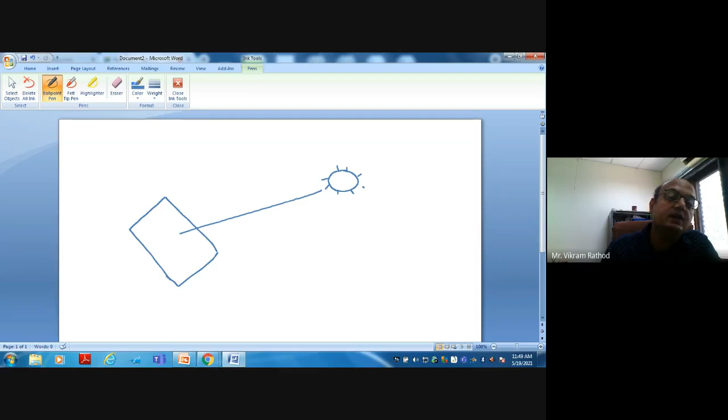So there are a number of various terms which we will be using here in the presentation. I thought let me explain you initially, then I will have a presentation. Now there is one term which we put as aperture area. There is one more term called concentration, C. A term concentration, term C actually.

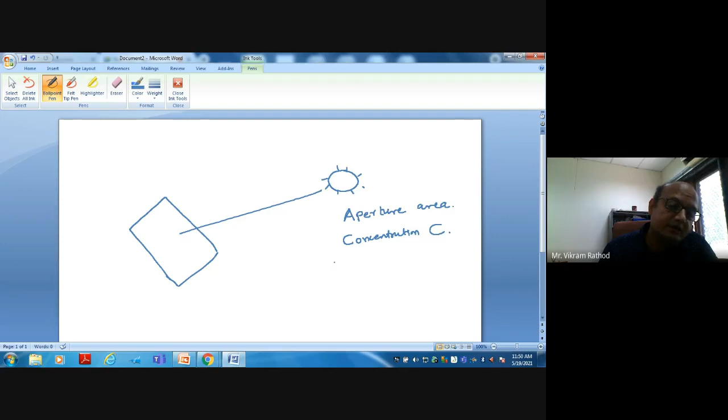There is one more term which is many times used as active solar and passive solar system. Now what is active and passive solar system? And one more term many times used is actually tracking system. So in which system we are using this term, let me explain you.

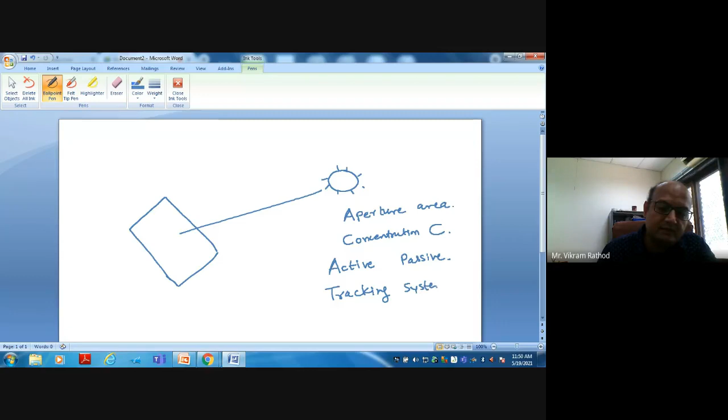See, if I talk about this solar collector - if you measure the area here, this is the aperture area. We know this is having a certain height, let's say h, and some width b. If I multiply this, I will get the area. But this is a flat surface, so it's very easy to find area. There is one thing called concentration.

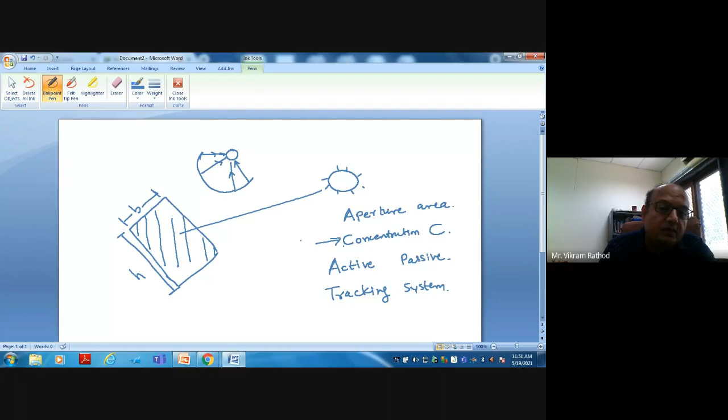Now this concentration is not effective as far as this flat plate collector is concerned. Suppose you have this type of collector and you are concentrating at a certain point - this is how you are allowing it to have concentration. All the radiations are concentrating at some absorber area. So this ratio comes - the ratio of absorber area to the collector area. This is actually a constant C which we are applying here.

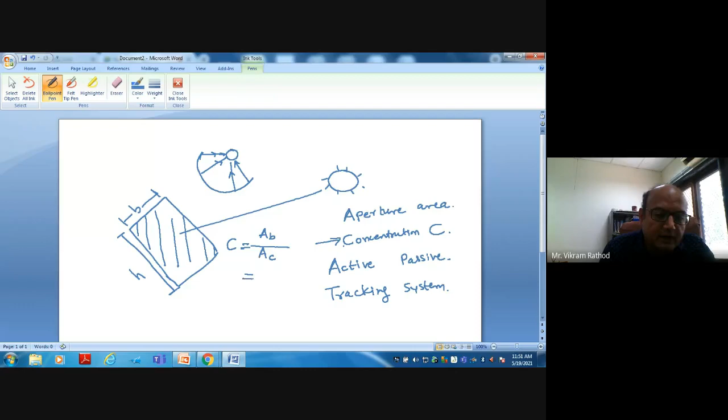Now this can start moving from 1 all the way up to - I will show you that it may go all the way up to 1500, this concentration. Now, do you need tracking in this type of flat surfaces? No, you don't need it. The flat surface will remain as it is, but you need to place it in a proper orientation. You don't need tracking. Now, how many types of tracking are there?

There is a single axis tracking, and there is a double axis tracking. Now, why do we need to track? If you want higher concentration and your collector - let me just show you one more, let me remove all this.

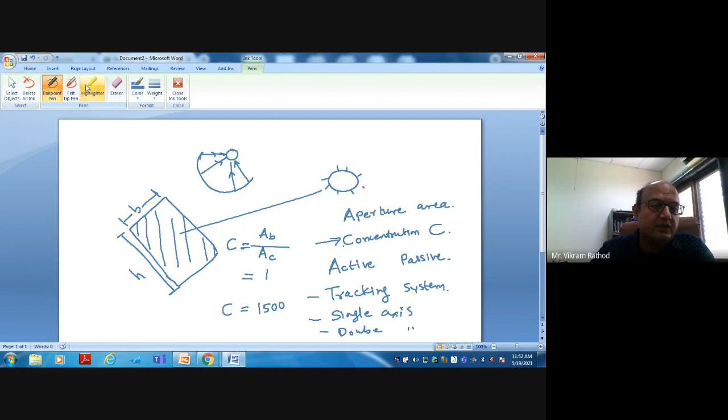Suppose you have a solar collector like this, where your concentration is at a line, line contact is there. This is your solar collector. For this type of collector, let's say any type, we are not defining right now, you have a line type of absorber. And here you need single axis tracking.

Another type is, let's say if you have a dish like this, a 3-dimensional dish. In that situation, you need double axis tracking.

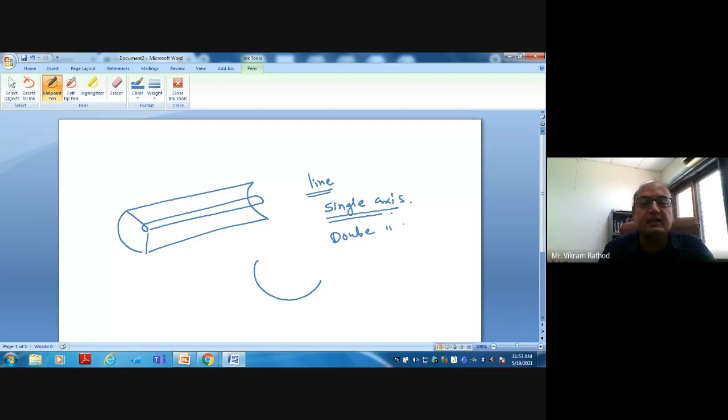Now let me introduce one more term which is more frequently used: active system and passive system. For an interaction, can anybody tell me what is active and passive system? Yeah, there are participants I can see here. Am I audible to you? Can anyone reply what is the active system and what is passive system?

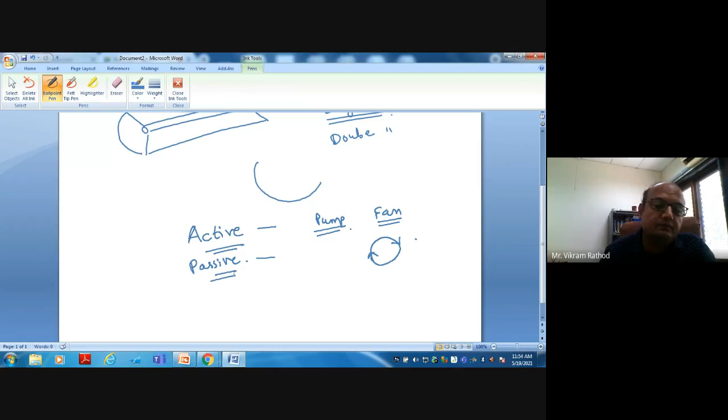Okay, so let me talk about this. Suppose you are moving fluid with some pump, or with some fan, or with some kind of machine. If you are allowing fluid which is to be heated to circulate with some device, then you can say it is an active system. Passive system doesn't have this type of devices. So these are also terms which will be used in this presentation. I thought let me explain you earlier before starting the presentation.

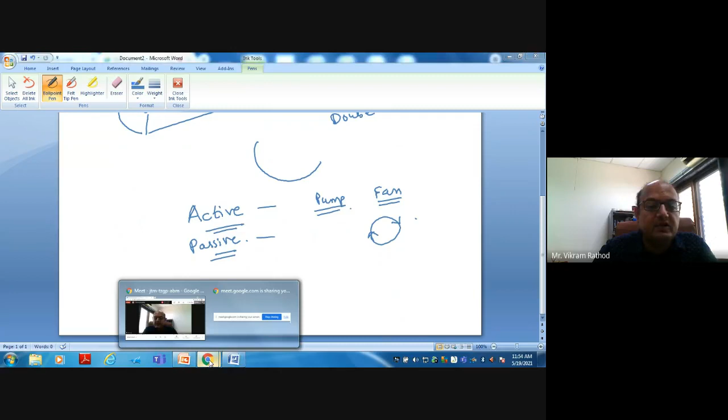So now with these basics, let me start my presentation here.

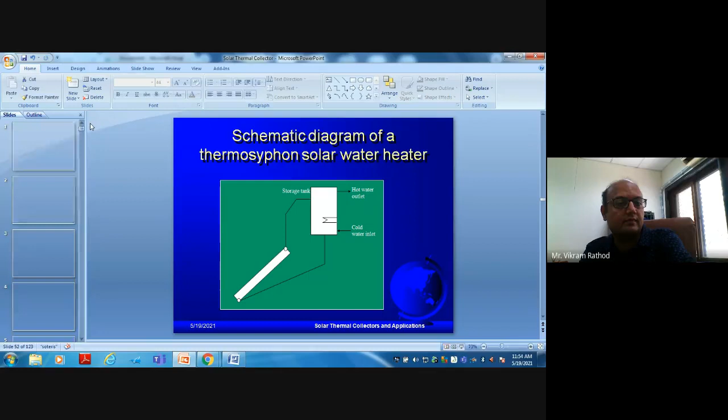Is this presentation visible to all of you?

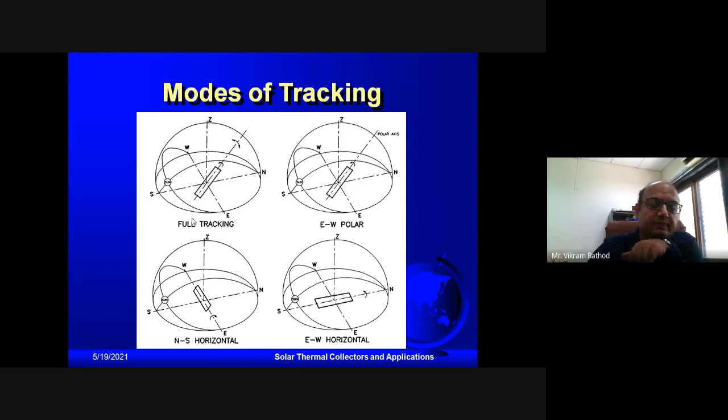So two-axis tracking requires all those concepts. In single axis tracking, you need to track the sun over about 15 degrees per hour or so. That kind of movement will do it, and even on a daily basis you have to move your system. I have seen certain systems where all this can be done with respect to tracking. There are tracking mechanisms available.

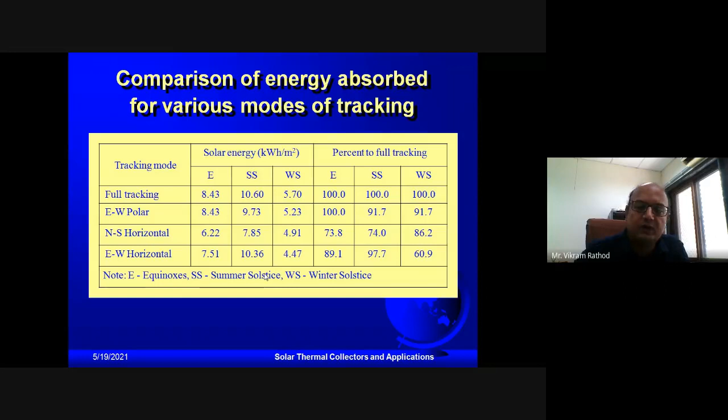Now let us talk about stationary collectors. Stationary collectors means you are not doing tracking, you are just fixing it at a certain angle, based on location. Then based on the requirement, you analyze the system.

One of the stationary collectors is the flat plate collector. I think you may have gone through this, and you may be knowing more in detail about the flat plate collector already. Shall I move on? Yes, sir. But still, let me talk about the basics of the flat plate collector.

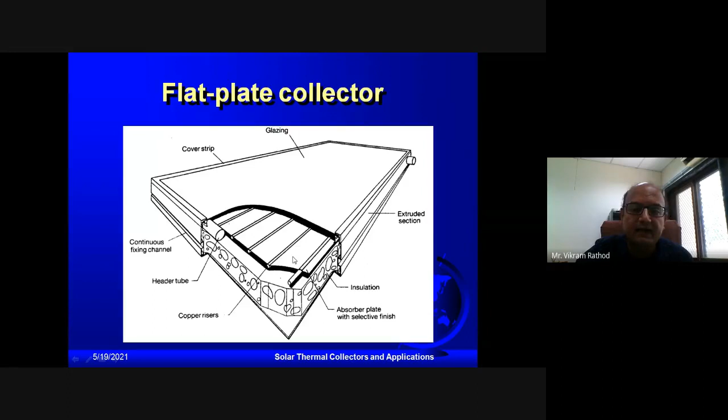The first part of the flat plate collector is the top part, which is glazing - you can say a glass type of cover. Then you have a number of tubes through which water or air is moving - the absorber plate, which is painted black, and on both sides you have collector tubes called headers, and then side covers and so on. These are the basic components of the flat plate collector - these are the pipes, or you can say header tubes, and so on.

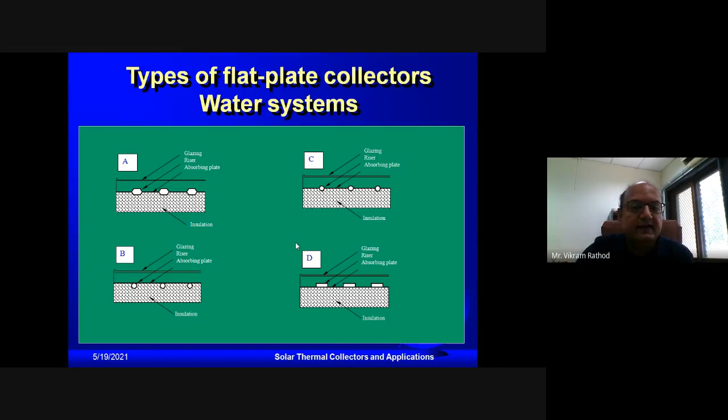So these are the ways in which you can also see the performance effect. Everything else is the same - the glass tube, the gap for air, the absorber plate material, all the same - but there may be an effect of the shape of these riser tubes, and even the size of the riser tube. These are called riser tubes, through which water rises from the bottom to top, or from the inlet header to the outlet header. I hope this is clear to you.

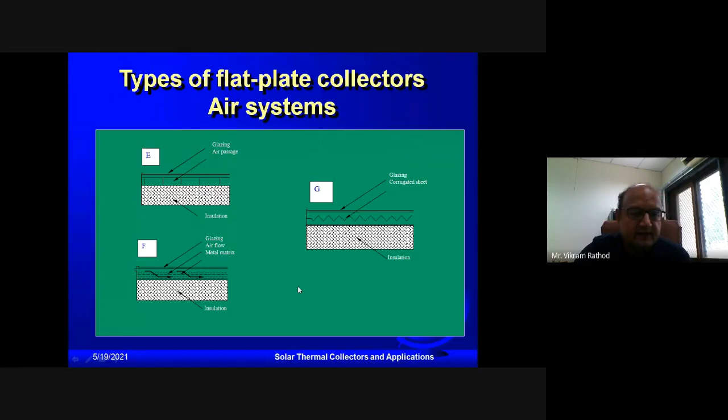So now we are coming to the next type, which is the evacuated tube collector.

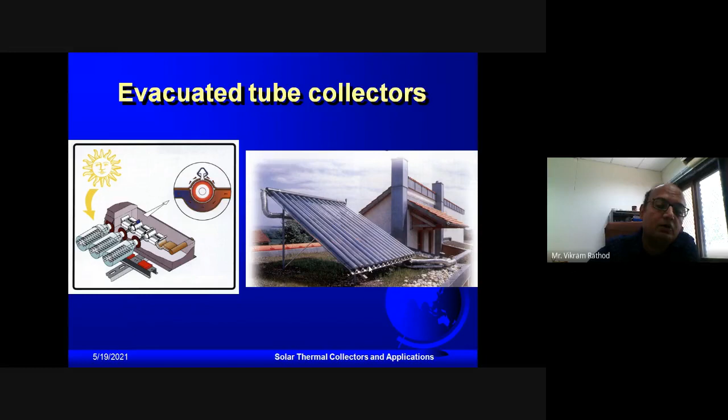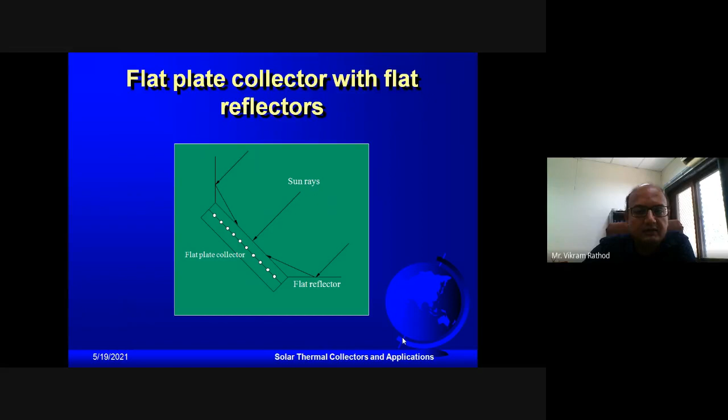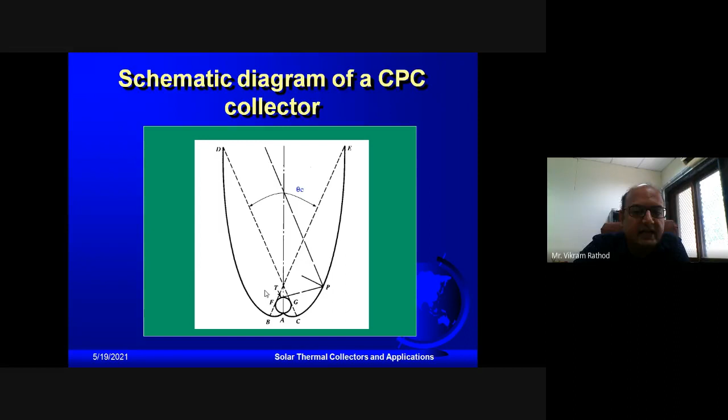And again, there is a series of this shape, so you have a line kind of collector, compound parabolic collector, but it is line kind.

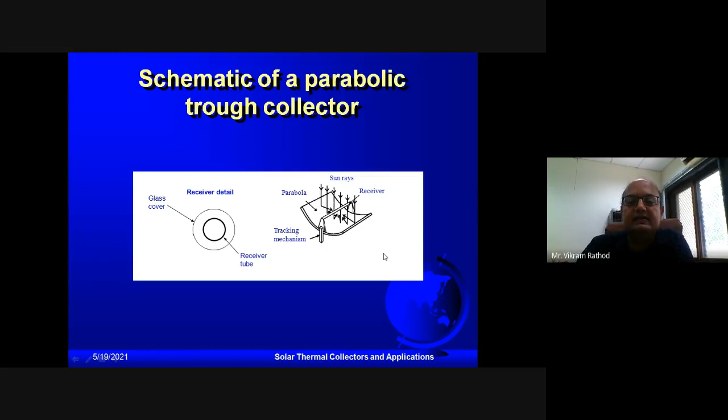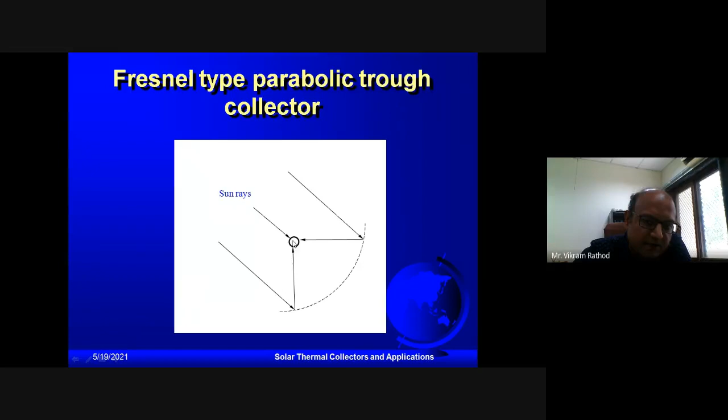Now we are talking about another type of collector, which is the Fresnel type collector. Fresnel is similar to the parabolic trough in concept, I am talking about in concept, it's not a parabola at all. But in a parabolic collector, what we have is number of incident radiations reflecting back to a point type of collector. So similar concept is there in a Fresnel type collector. Let me show you here, there are a number of mirrors set in such an inclination that all are reflecting back to the receiver end. So it is similar, I am saying, it is not like there is a parabola at all over here.

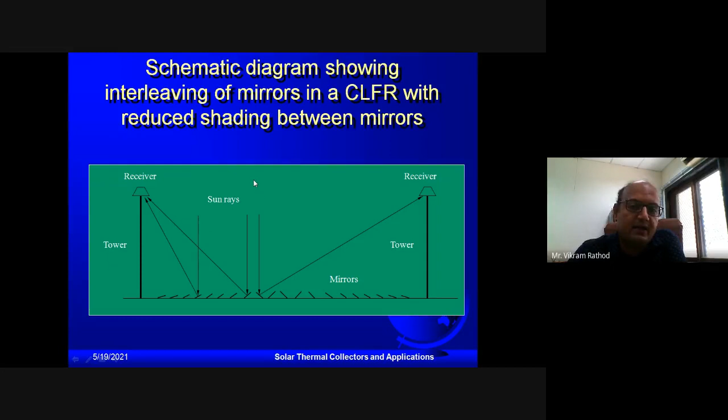The next type is this type. As I keep asking you, am I audible and can you see the screen?

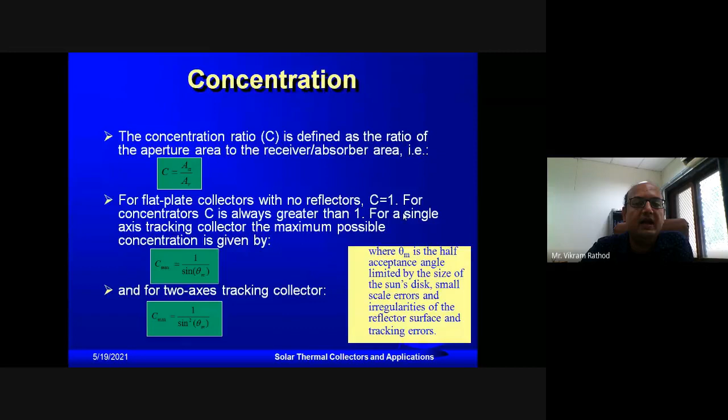Let me go back to the point where I stopped. I was talking about thermal analysis. Now, concentrating collectors. For a concentrating collector, we are defining useful energy as GB into NO into AA minus AR into UL into TR minus TA. Let me define various terms over here.

Now if I say GB is beam radiation. When you talk about a concentrating collector, we are not talking about diffuse radiation, only beam radiation. Now what is NO? NO is the optical efficiency. AA, aperture area, is your aperture area.

AR, what is AR? Receiver area, AR is basically the receiver area. UL, again, that heat transfer coefficient, or you can say solar collector heat transfer coefficient. TR, receiver temperature. TA, or you can say ambient temperature. Let me repeat.

QU is useful energy. GB is your beam radiation; only beam radiation we consider for concentrating devices. NO is the optical efficiency. Aperture area, receiver area, the aperture to receiver area is a huge difference. And UL, as I said, is your solar collector heat transfer coefficient.

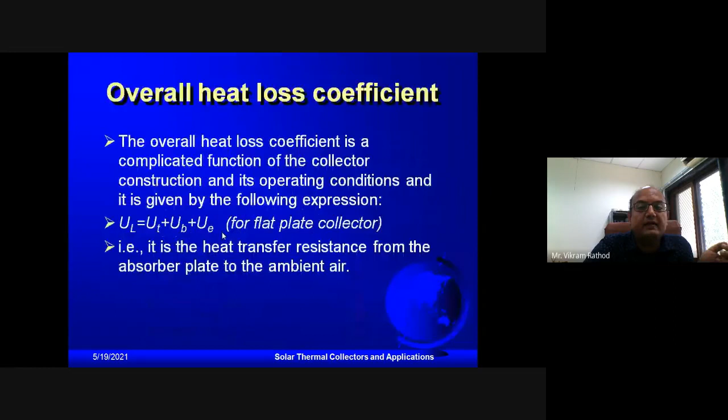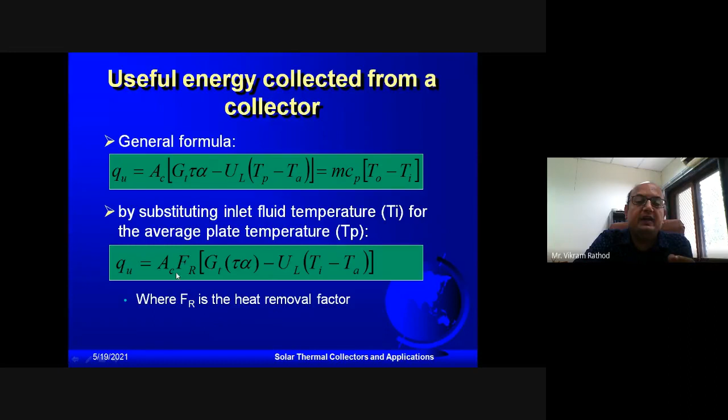Similarly, if you see QU for a flat plate collector, I am just going back. This is Q useful for a flat plate collector. Both formulas have FR into UL into temperature difference. So that is rewritten here. For a flat plate collector, you have this equation, and for a concentrating collector, you have another equation.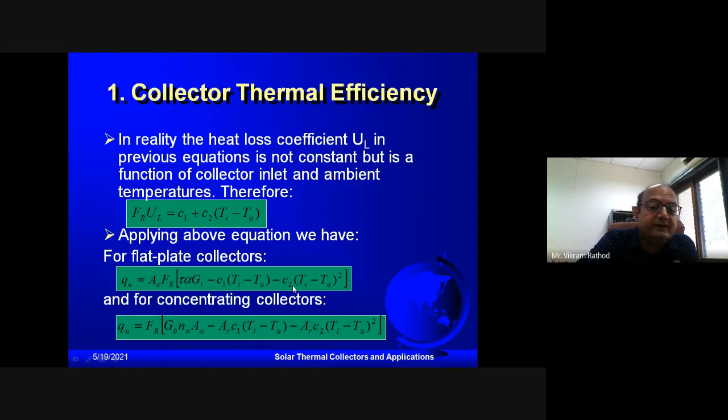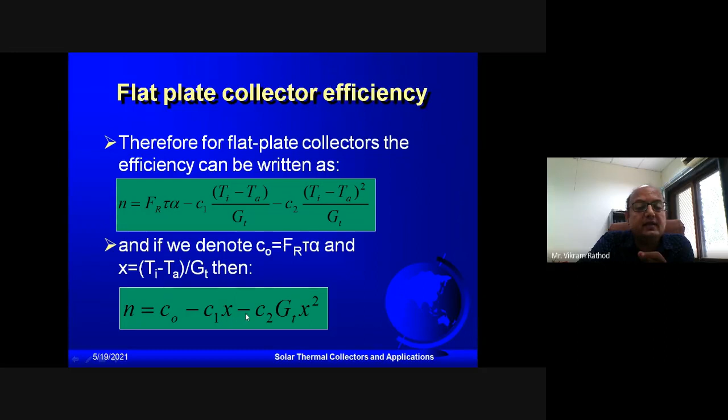So what you can do, these efficiencies you can write in terms of C0 minus C1 into X minus C2 into GT into X square. So this second order equation, if you say that C2 is 0 and K2 is 0, you can have a further simplification. I'm not going into the mathematics part of this second order equation.

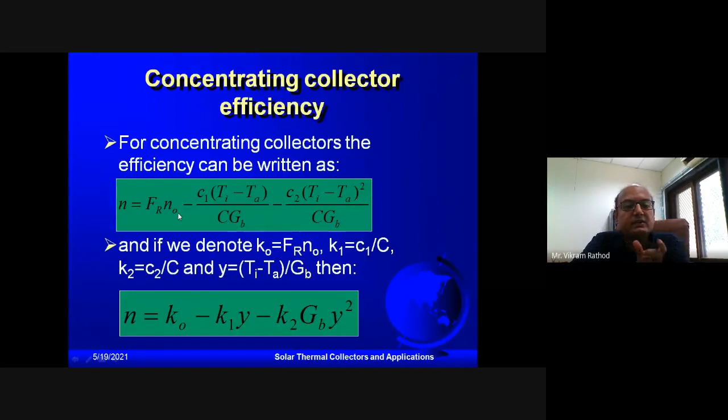Efficiency is FR into NO. Those second order terms are very, very small, so you can remove that. So you have only two components of the equation, which becomes a very simple equation. Suppose if this third term is 0, over here also third term is 0, then you have only two terms as far as overall efficiency is concerned. That is what is explained here.

So with this, you can draw the efficiency plot. What can be seen here with the temperature difference? Efficiency is a linear function, whether it is a concentrating collector or a flat plate collector—all are linear functions of temperature difference. So for a temperature difference, you can see all types of collectors. The highest efficiency is for PTC collectors, where irradiation is 1000.

And for evacuated glass tube, here this is the trend for a temperature difference. Temperature difference of the order of 80, 90 or so—80 degree or 90 degree is highest.

So this analysis you can do with those equations, with of course a lot of considerations. There are assumptions. I can tell you that this performance does not include the incidence angle effect, heat exchanger effect, heat loss effect, control strategies—those things are not covered here. This is instantaneous performance. So those things, if involved, may make it not linear.

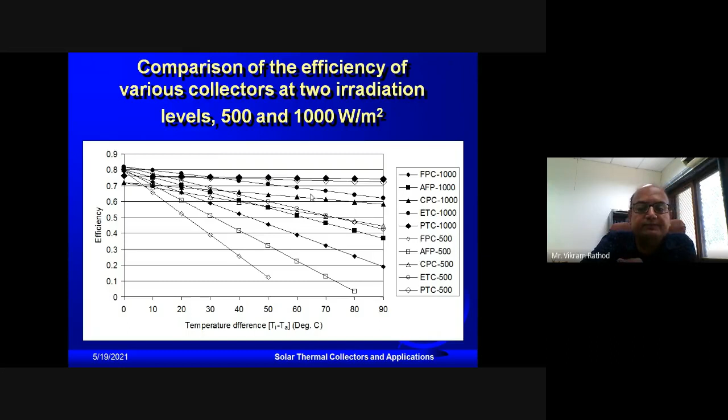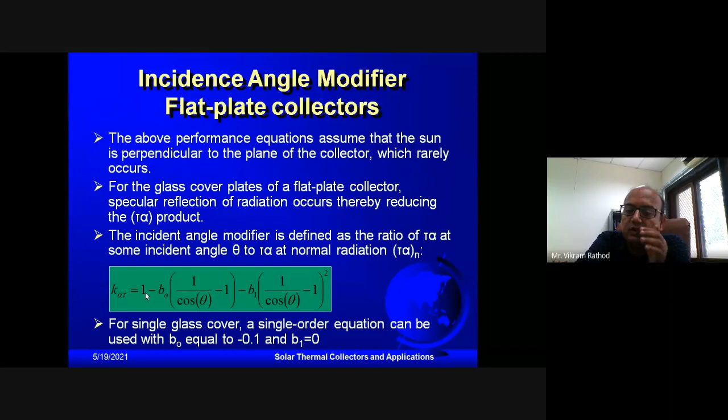Now there are other equations because we are assuming that solar radiation falling on a collector is at 90 degrees, but that may not be the case. So there is a factor called the incidence angle modifier. These are the equations for it. If solar radiation comes at 80 degrees or 70 degrees, not perpendicular to the collector, you have to apply this incidence angle modifier, which accounts for reduced solar radiation. So this equation you can use for that.

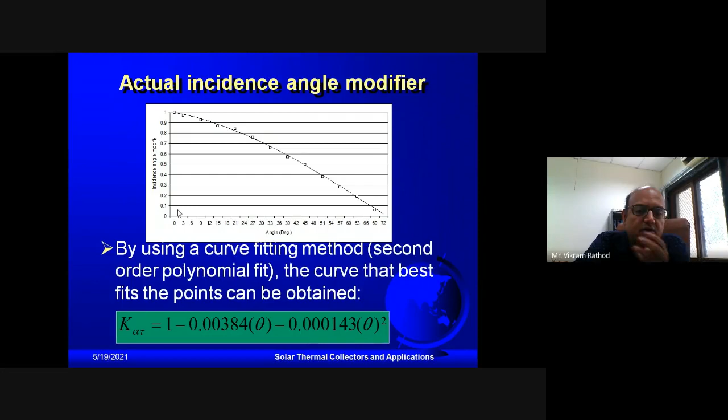Another factor is the collector time constant. This is also very interesting, and I'll explain it slightly. Suppose you have the fluid temperature at, let's say, 100 degrees Celsius. To reach that 100 degrees Celsius takes a certain time. So this is a transient process.

Suppose it reaches 63% of the steady state temperature - what time does that take? For that, suppose the collector outlet water temperature after time t is TOT, the collector outlet initial water temperature is TOI, and the collector inlet water temperature is TI. This is time dependent. For example, it takes some time to reach this level. This is actually called the collector time constant - it takes some time to reach that steady state. This time constant tells you what the time constant is.

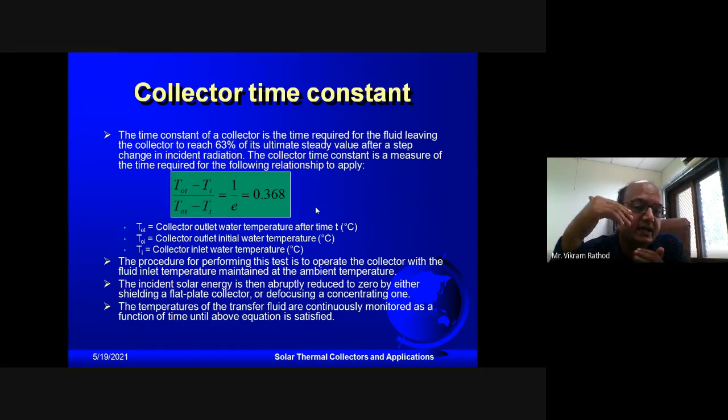Are you with me? Suppose your collector reaches a temperature from 40 degrees Celsius to 80 degrees Celsius over some stipulated time - this factor tells you what time it takes to reach that steady state. So with this equation you can find out the collector time constant. So these things you can also do.

All these aspects are required as far as thermal collector design is concerned. I've talked about all aspects of this performance analysis. These are the factors you need to keep in mind while designing various types of collectors.

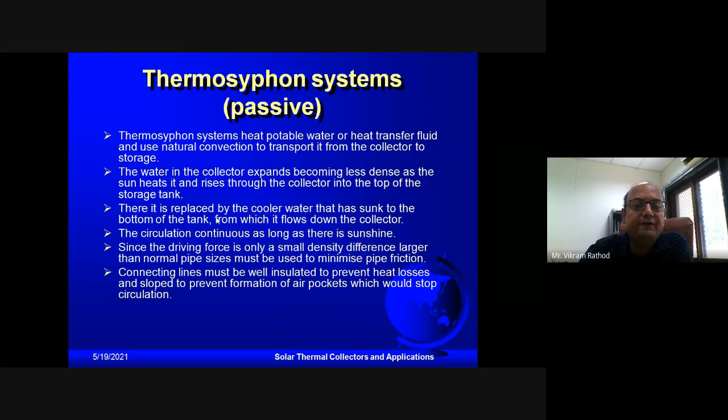Can you see the figure which I have open here? Yes sir, okay. I think I have half an hour, I will try to see that. I still have 60 slides, so I have to be slightly fast, but still I will try to see that you understand more, and rather you can have a zeal of research in this area.

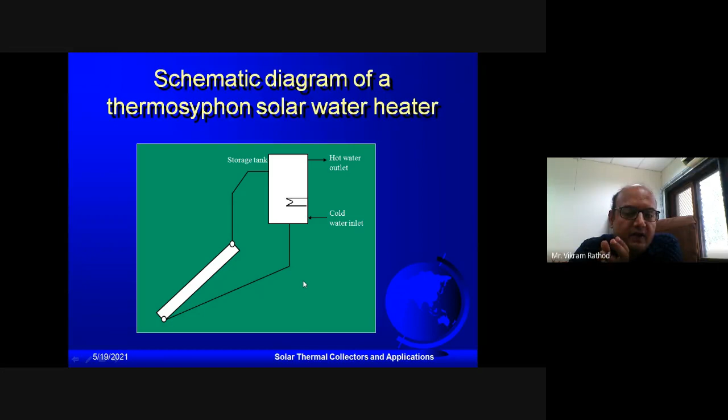So here this is one of the collectors in which you can see the lower header and upper header. This is, let's say, a kind of flat plate collector. Just because of gravity you are allowing water to flow, and as you have solar heating over here, the hot water moves up and is collected in the storage tank. This is actually known as the thermosyphon effect. Just by natural density difference, water is flowing, or you can say steam is flowing. Normally you will not find steam here, you will find hot water, but it is the thermosyphon effect. There is no pump or nothing is there. So let us see how you can have a real application of this type of solar water heater.

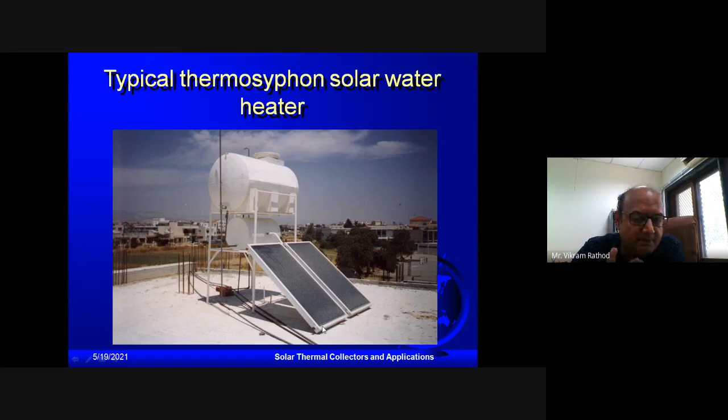Again, you can see the cold water, hot water system. Hot water is rising, that's why it's called a riser - water is rising. And this is actually kept at a certain inclination. That inclination also needs to be designed. So at UG level, you know, terrace kind of experiments for a household, you can definitely design. Very simple - you don't need any device required for the motion of the liquid and all.

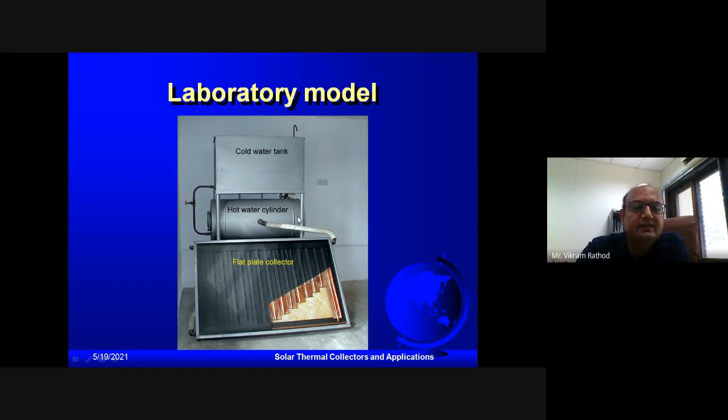Very, very simple flat plate collector - flat plate collector, two tanks. But this hot water tank needs to be kind of an insulated tank. So a laboratory model also you can develop very easily. You can see on top of the house how this type of system can be installed.

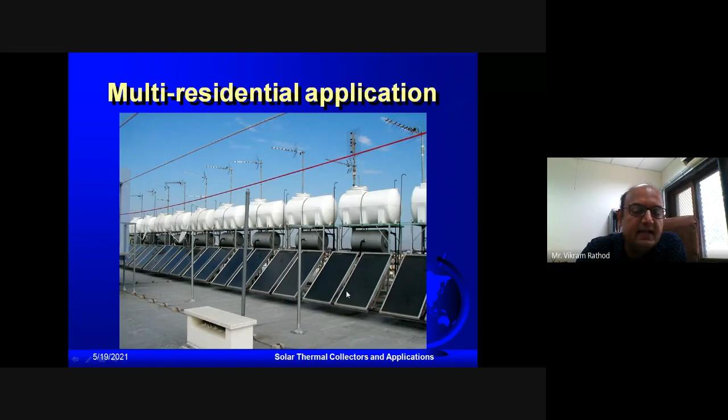Another system, similar system - yeah, another application. You can also have for apartments, you know, multiple cylinders. Each household can use it, but it's multiple systems - the same system, but you have two collectors because the family requirement is larger, number of households are there. You can have this type of system.

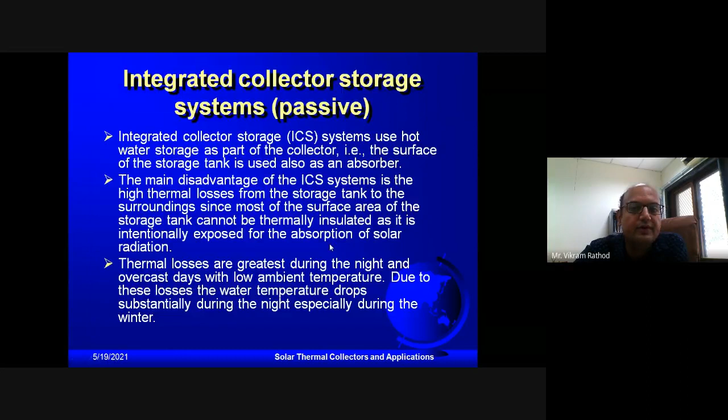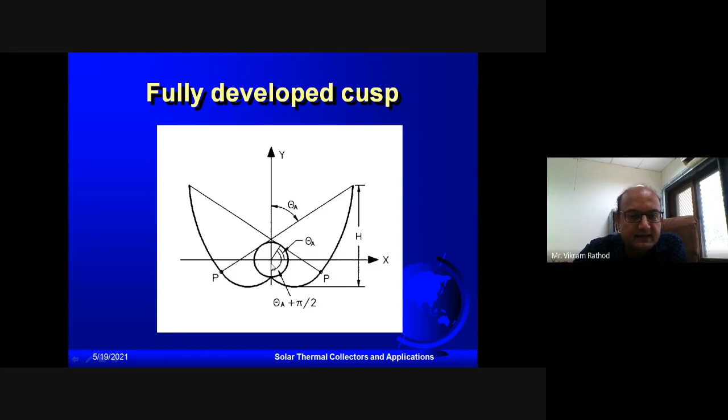Yeah, pressurized systems also you can have. This is the type of CPC which we were talking about. You have a collector in which the internal absorber is there. All these radiations are falling on this absorber plate. This is actually known as a fully developed cusp.

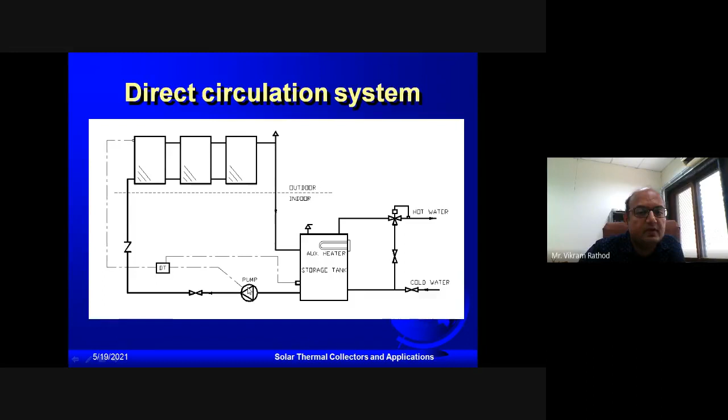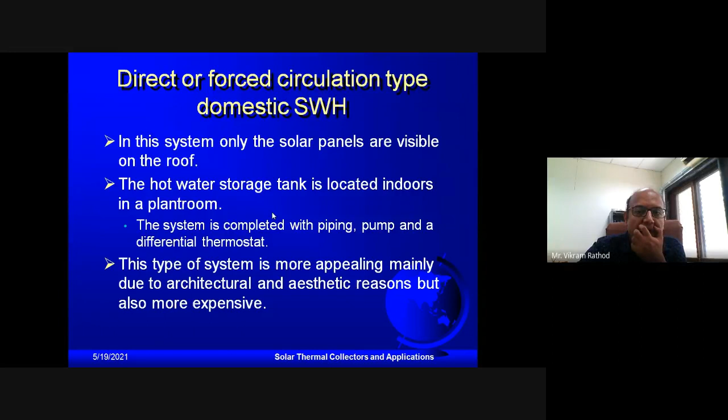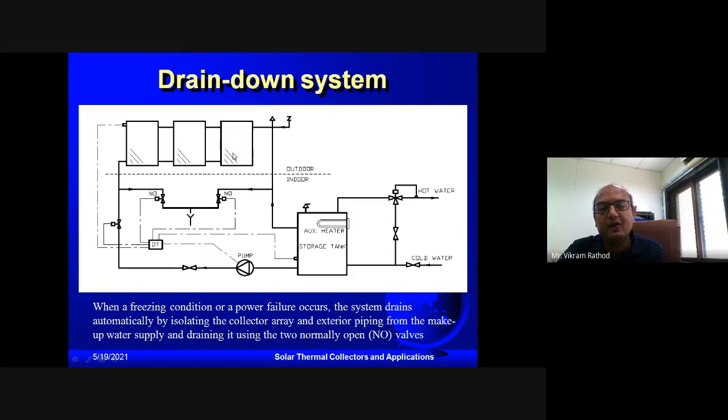If you apply the earlier system to households, you can see only collectors are at the top, outside. The rest of the systems are in the room, you don't need to keep them outside. These systems can be indoor - this is the advantage of this type of active system. You only need to place the collectors, be it flat plate or evacuated glass tube, outside the room. The rest is inside.

Same is the system over here. Collectors are outside, two, three, maybe you can put a number of them in series, and the rest of the systems are inside.

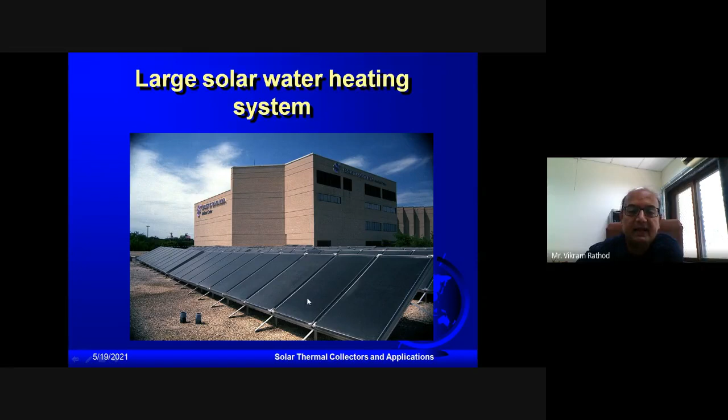You can see here a large solar water heating system with a number of flat plate collectors. What you are doing is allowing oil or some additive mixed with water in the primary circuit, and then the secondary circuit is inside the room where you have some kind of application.

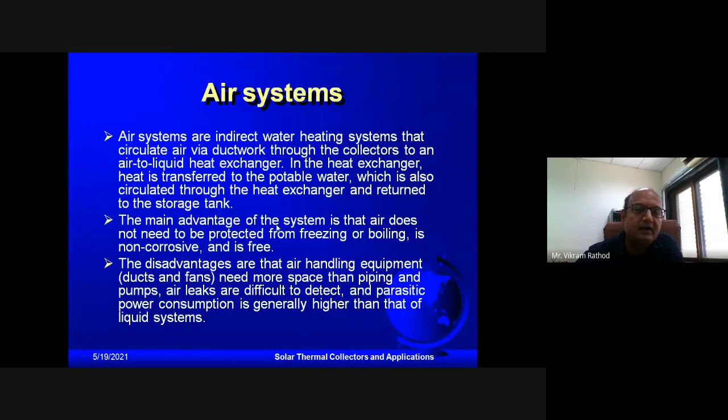Now, as you can heat water, you can also heat air. Let us see how this air heating system works. In air heating system, let's say a flat plate collector or evacuated glass tube collector has a primary circuit where air is heated.

And we know for pumping water you need a pump. So for the secondary motion of the water, you need a pump and valve. This is the air system - primarily in the collector you are heating air, and this is an active system because you are supplying air with the blower. You have to control the flow rate as per the design flow rate, and then that air transfers heat to water in the heat exchanger. I hope you have understood this system.

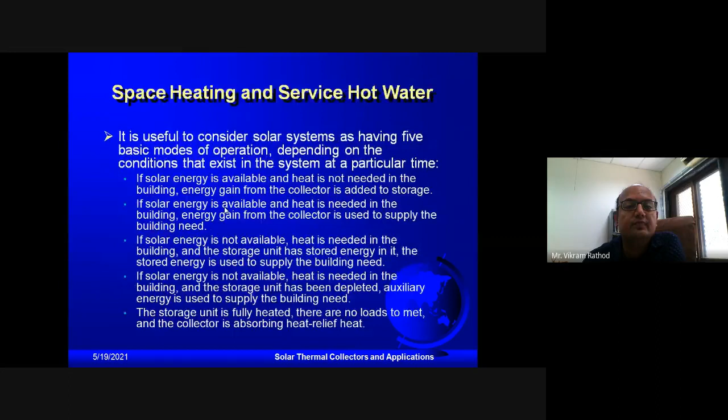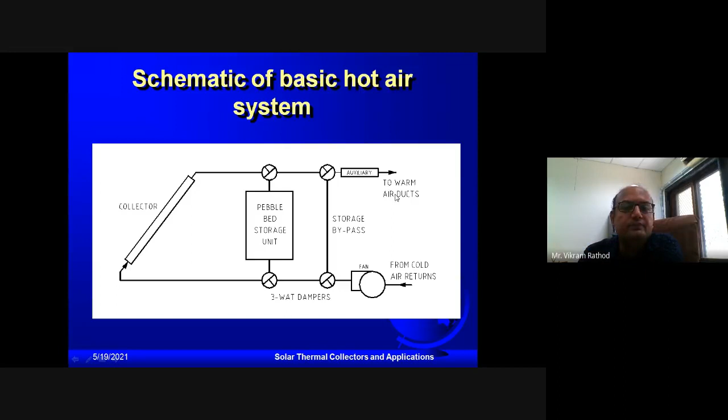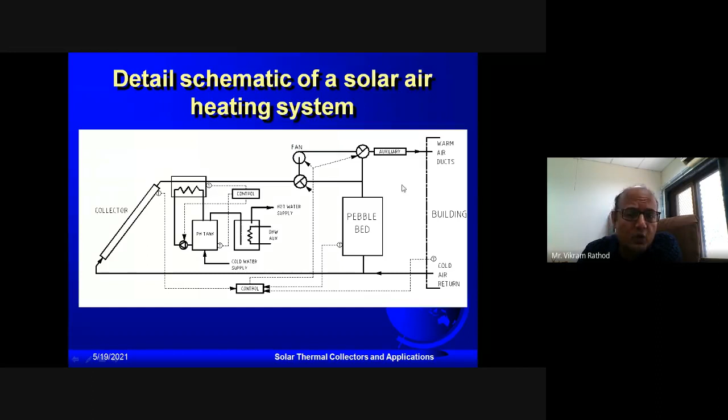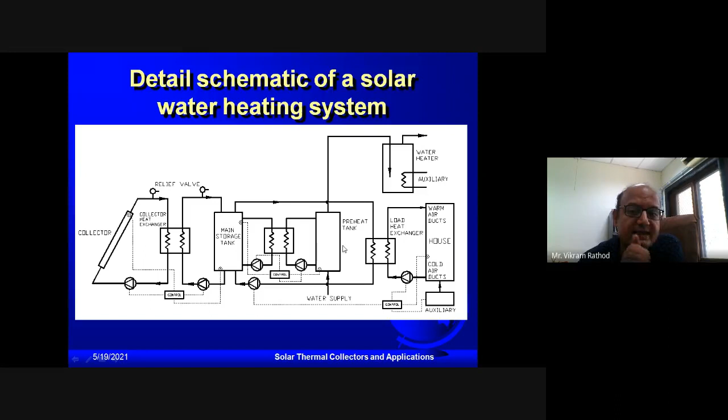First of all, you have the collector with oil. That oil transfers heat to some heat transfer fluid, and that heat is stored, and then from that you have two systems: one is air which is taking away heat, and another circuit which is water taking away heat. So there is a single storage tank from which your two requirements of water as well as air heating are taken away, with multiple heat exchanger units.

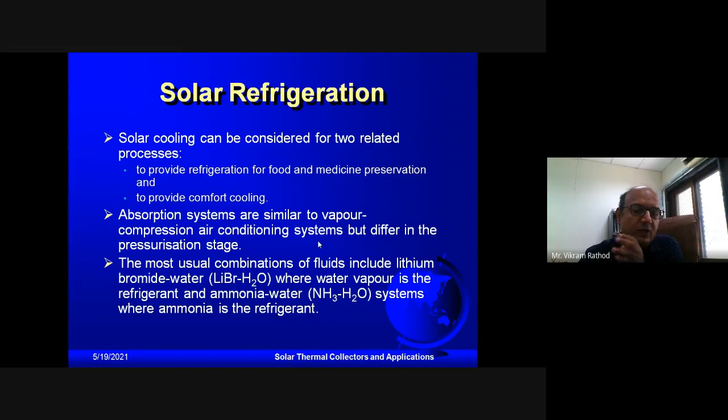Refrigeration, I am not going into detail, because we know refrigeration systems work on two concepts: vapor compression refrigeration system and vapor absorption refrigeration system. In vapor absorption refrigeration system, you have a generator. That generator requires heating up to 100 degrees Celsius. For that heater you can use the solar collector. So that is the concept explained here, but I am not going into detail.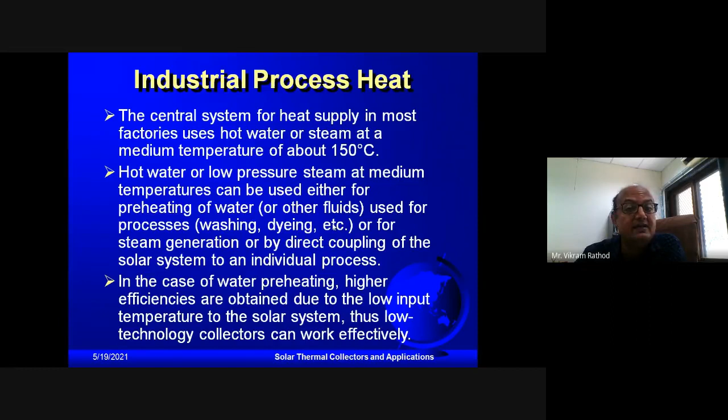You can also have an industrial process heat requirement. Let us understand that. Let's say you have a conventional boiler, in which you are just preheating water. Whatever water you supply is preheated - let's say ambient 30 degree Celsius water is heated to 70 degree Celsius. If you can do this with a solar collector, then the efficiency of the entire system can be enhanced.

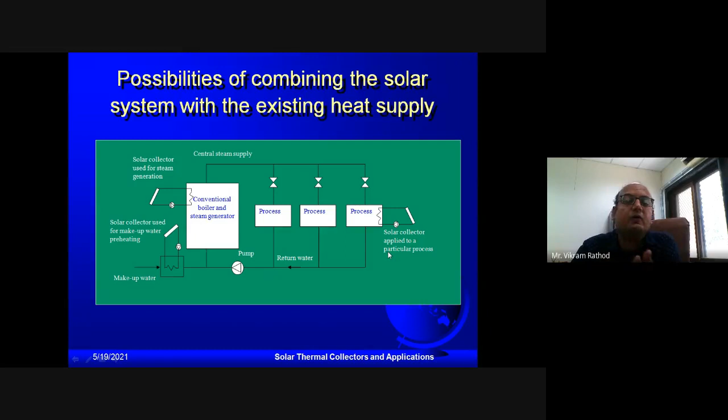In some processes, let's say you need a requirement of 200 degrees Celsius water or air, or some other process requirement. Let's say Surat is full of textile industries - you have a requirement of steam, a requirement of hot air, for textile processing units and so on. Then you can have this type of system. You can see here, solar collector used for makeup water heating, solar collector used for steam generation. Of course it can augment or enhance performance, or be used for enhancing auxiliary kind of requirements. So there are 2-3 processes, and one can be connected to the solar collector. This type of application is also there as far as solar collector is concerned.

So parabolic trough collector is used for generation of steam. Here straightaway steam is generated, and that steam is supplied to the flash vessel. Flash vessel has two components - it has water as well as steam, so steam can be flown through the valve. So one concept is the steam flash system, parabolic trough type collector with steam flash system. The pump is used for pumping the water, and then you have a two-phase flow - one is steam and another is water, high temperature water.

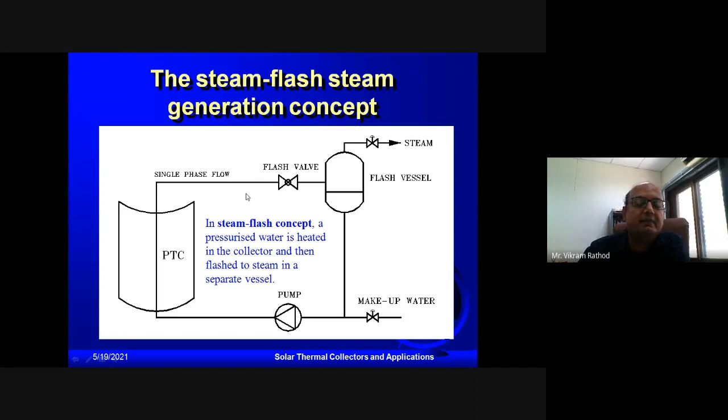Another is like an unfired boiler steam system. Unfired means there is no firing in the boiler. Whatever steam is generated through this parabolic trough collector is transferred to this dome, or high pressure vessel, and that steam is allowed into your load or requirement. This system also has a pump and an expansion tank. So this is the concept of an unfired boiler: heat transfer fluid is circulated through the collector and steam is generated in the heat exchanger.

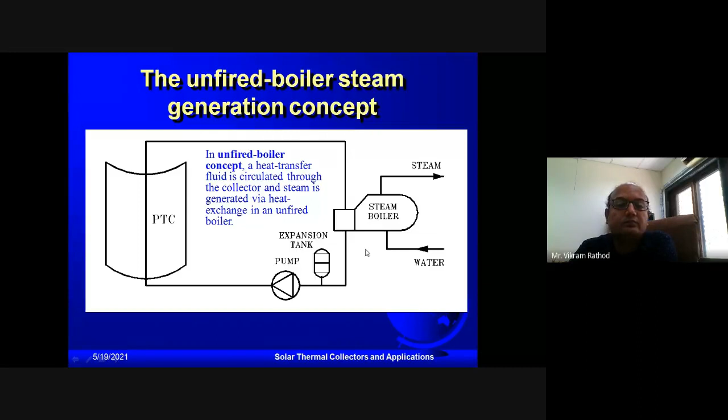The concept of desalination, I am not going into detail, but let me explain this figure. Desalination is a concept where you have a large basin, or water body, with insulation at the bottom. Direct solar radiation falls on the water basin, and once heated to appropriate temperature, steam is generated in the system. The vapor bubbles are collected on this inclined surface, and fresh water is collected in this area, which you can collect outside. This requires a large surface area. So this is also one of the concepts of a solar collector used in a solar desalination system. You can have different shapes and effects, which are shown here; you can study this in detail.

But the basic concept here is that a large water basin is there, and a glass cover is kept so that you can collect the steam. As it cools down, it falls as water, and that is collected as fresh water.

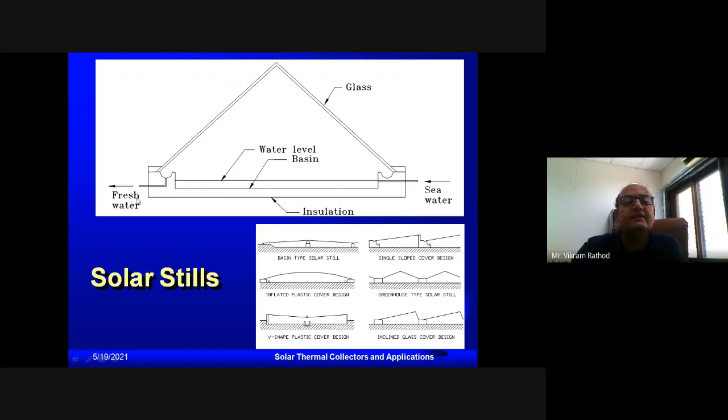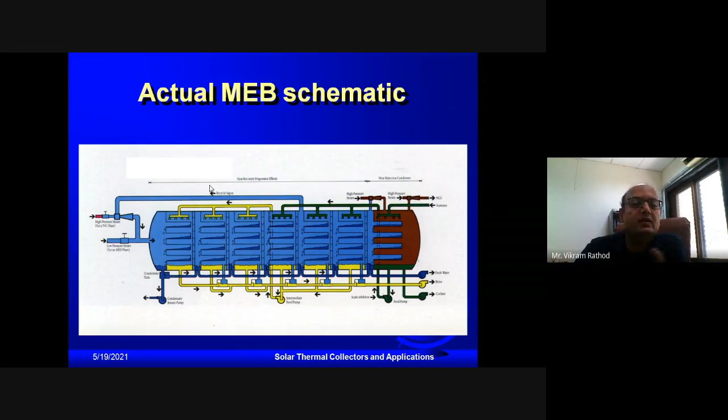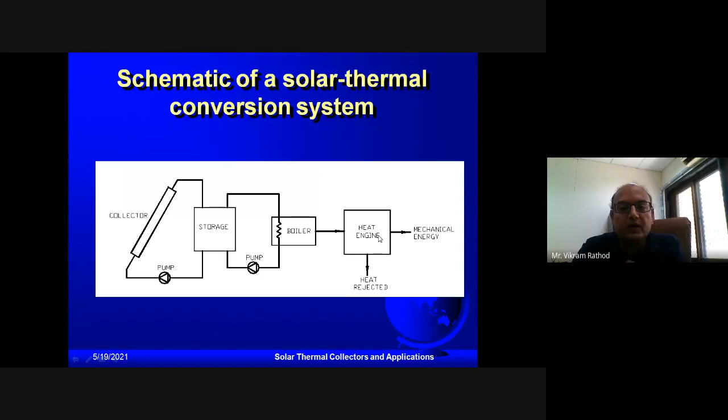Thermal power system: we know boilers are basically used for power generation, and heat engines are used for power generation. So what you can do is use a collector, a parabolic trough collector, along with a heating and storage system and a pump. This boiler is basically used for power generation, or conversion of water to steam. So here, instead of a fired boiler, you can use thermic oil, and that heat is exchanged into the boiler, which is used for power generation in the heat engine.

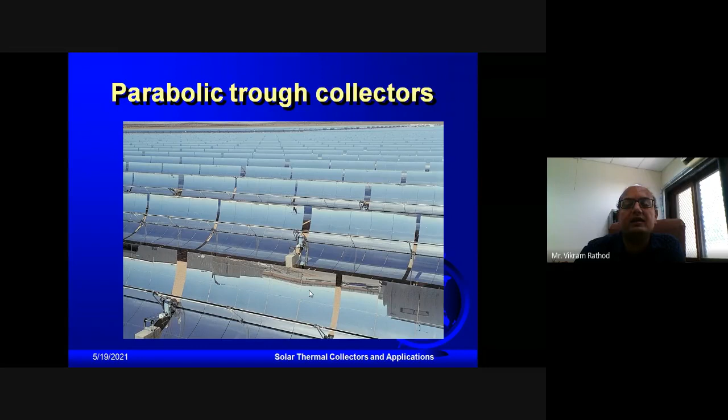This is how you can go in detail of the parabolic trough itself, what kind of glass they use, what reflectivity and transmittivity it has. There is a lot of in-detail study of that.

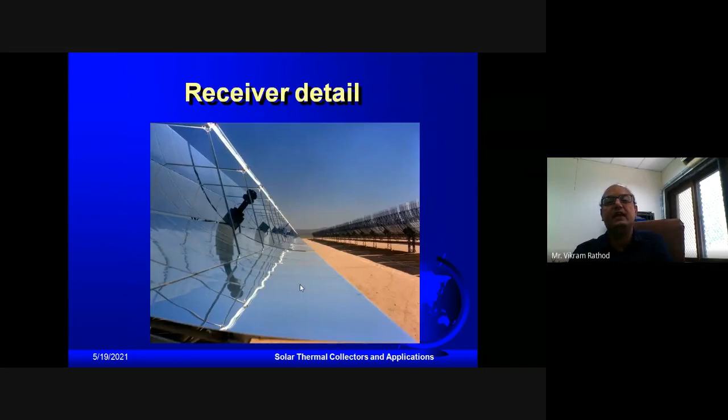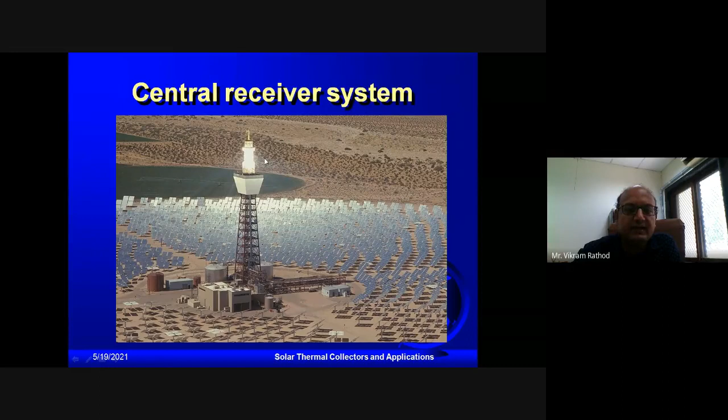This is the pictorial view of the central receiver system I was talking about. Linear glasses, all glasses are focusing at one tower, this is the receiver end. This is the tower detail. You can have a thermic fluid here, turbine here itself, and then electricity can flow down.

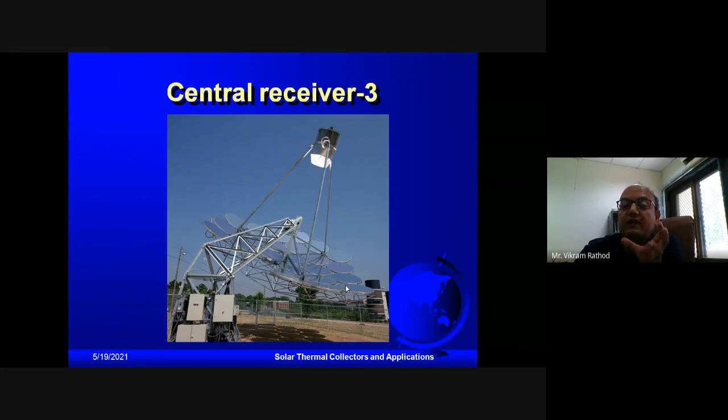Again, central receiver with a dish type. Various dish types are there, a circular dish, 2-axis tracking required. This is moving throughout the day to generate power here. Another type of dish receiver. All these are dish type collectors.

I would like to explain one more thing: there are softwares available. One type of software is TRNSYS, developed by the Solar Energy Laboratory at Wisconsin University, US. This is also a very important tool you can use for analysis purposes. Another software is WATSUN, which you can also use for analysis purposes.

There is a famous quote written by the author from whom I have taken a lot of material: solar energy should be given a chance if we want to protect the environment. We owe it to our children, our grandchildren, and the generations to come. Thank you very much for attending. I have kept a few minutes for discussion.

If not, I have also worked in certain areas, so I can go back to the board and show you a few more things I have worked on. But rather, I will give a few minutes for discussion first. If you want me to focus on some area of this presentation, I can do that, or if you have questions, I will take them. Otherwise I will focus on some part of the presentation.

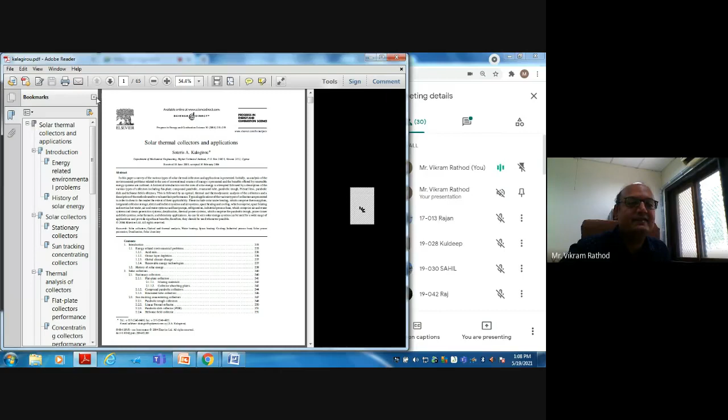Can you see the screen right now? Yes sir. So I am going to share this paper with you, which I have considered as a reference: Solar Thermal Collectors and Its Applications, by Soteris Kalogirou. He is an editor in many solar energy journals, from Cyprus, and has written this 65-page paper. If anyone is interested in any area of this presentation, you will find complete detail in this paper itself. It's like a book for those who want to work in this area, and I'll share it with you.

Sir, one question I have. You showed in your presentation that you can use solar collectors to raise the temperature of the feed water in the power plant. But sir, practically, I have seen an article that in the thermal power plant, waste heat through the chimney itself has a very high temperature. So rather than using solar collectors, if you can recover the same heat, you can raise the temperature of the water. Is that true or not, sir?

Of course, it is right. But suppose you have a requirement of higher temperature, and if you use thermic fluid, you can reach 200 degrees Celsius, then the performance enhancement will be significant. The only limitation is you need a lot of land and initial cost, otherwise it is beneficial. Because with thermic fluid you can go to 200-300 degrees Celsius, so steam generation can be done straight away there. But with waste heat, you cannot reach that level of steam generation.